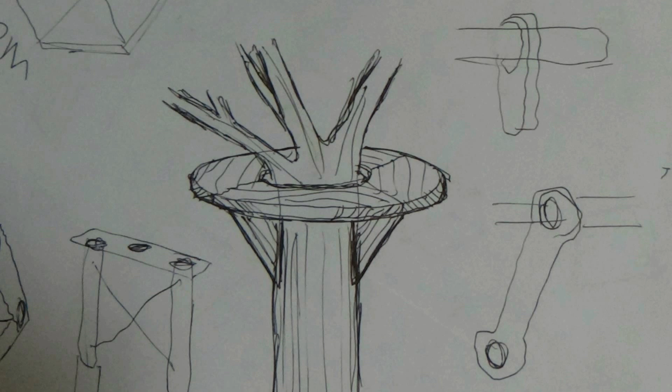Another kind of childhood dream was to build a timber structure, a tree house, and Nigel very kindly offered me the opportunity here about 10 years ago to build a tree house.

So at any rate, having bought my own tiny bit of land, the first thing I did was build a bird hide, and I call it the pack flat bird hide. So this is the finished thing, and it was kind of a back-of-the-envelope sketch.

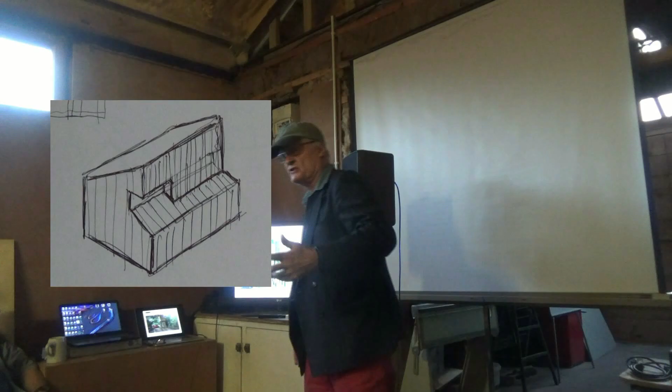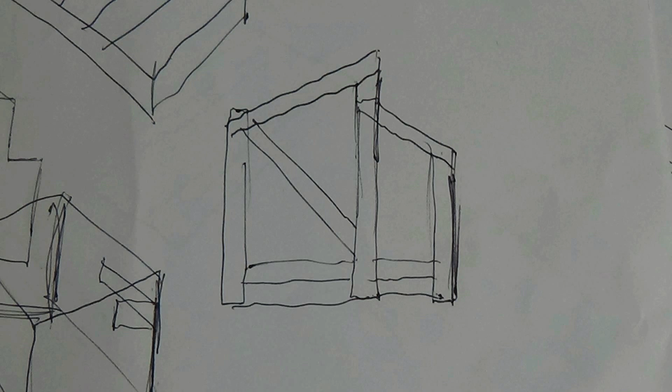It's very small. I designed the detail of it literally sitting on a toolbox on the platform, using a tape measure above my head and how far my knees stuck out. The irregular shape is where, if you think of it as a side profile of me sitting down and viewing the river, it's that small.

Because this, actually, I nearly broke my neck on this one. I built the platform, semi-built it in my workshop, and it fitted on the roof rack of the car. I deliberately left the inside hollow because it was too heavy for me. The whole thing was built by one person and it's heavy.

So this is about my 6th attempt on the ladder, nearly landing up in the river. At one point it pivoted round one of the poles and trapped me to it, like a clamp, and there was nobody else around to help. Once I got it on top, then I could slide it over.

I've got a background in construction management, but I've only been in post at Westonbirt for about 3 months. So timber framing is a kind of new world to me. I don't know everything, I don't profess to be an expert, so be kind.

So a little bit about the Arboretum. Robert Holford was a Victorian entrepreneur who was also a plant collector and a visionary. He created Westonbirt in the 19th century, and it's one of the world's finest collections of trees.

The site itself is about 600 acres, and it's a historic Grade 1 registered park and garden, with approximately 15,222 specimens and 1,777 species of tree.

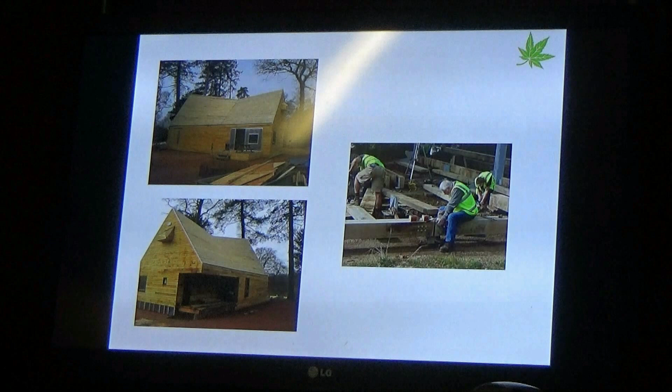As part of both of these buildings, we wanted people to have the opportunity to be involved. So at the mess building, we had our estate volunteers get stuck in. They had a really good go at the cladding, both inside and outside the building. And then as part of the tree management centre, in the next slide, you can see that we ran some hewing courses.

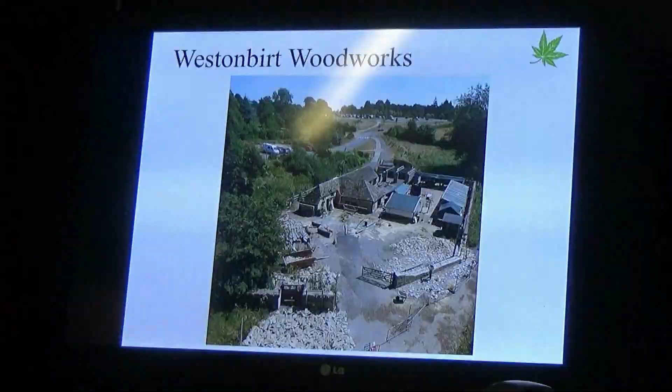Out in the downs, we created a bit of a spectacle and got everybody talking about what can be done with timber. So now we're entering our next phase of projects, and partly what I've been brought in to do is manage Westonbirt Woodworks. So here is the site. It used to be the plant centre, and it's currently situated just beneath our new treetop walkway, so it's got a hugely prominent position on site.

What we're really, really good at doing is telling the story of going out to collect the seeds, the propagation, the planting of the tree, and the life of the tree. But what we've not been quite so good at is telling the story about timber, how valuable it is, and what can be done with it. So this is almost like a showcasing of all the wonderful stuff you can do with timber.

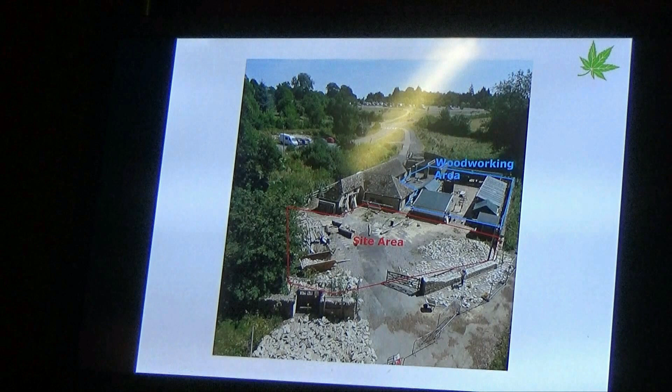It's also in line with the Forestry Commission's real push to look at sustainably British sourced timber, and also the centenary of the FC, which is next year.

So the site at the moment is just about to be leased by a chap called Paul Hayden, who some of you may or may not know. He runs amazing Windsor chair making courses on site, and he's going to take over this particular complex of Victorian agricultural buildings to run the wood centre.

So my role is to help build some of the buildings that we're going to have put in place and restore other elements of the building. So we're going to have a sawmill shelter for our brand new sawmill, which has just arrived from Poland into the UK. It's a Trak-Met 1200. That doesn't mean anything to me, but I'm told it's very good. And that's going to be situated in our new sawmill shelter.

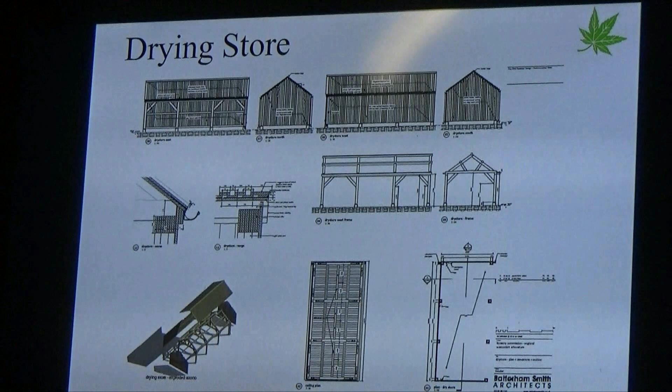There's then going to be a drying store, which is going to store all of the mill timber. And then the next phase of work will be a demonstration area, which is looking at conserving the cattle barn that we've got there, putting a roof on it, and creating a real hub for heritage craft and activity to enable lots of different people.

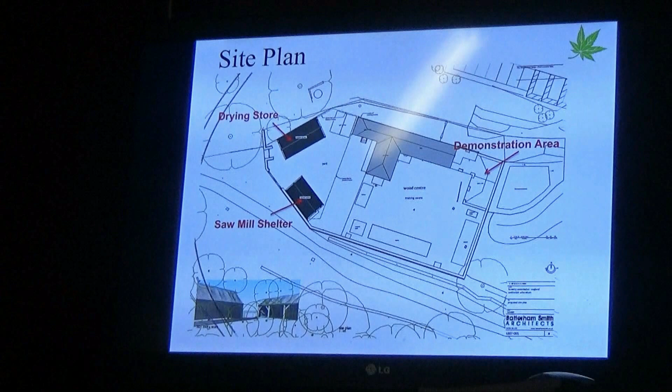Special apprentices, or specially accredited trainees, have this model in front of them, because this, as I say, is part of the family of the Carpenter's Fellowship as far as we're concerned. So all the new trainees are trained with that, and are photographed with that in front of them. So that's, yeah, it's a special relationship. Thank you for inviting us to be involved in these other projects as well.

So, the Sylva Foundation, let me start off. We're a small environmental charity, but we do work on a national level. Our mission is to help trees and people grow together. We work across Britain, and we are active under four main programmes.

We also have a programme called Education, and our main educational programme is forest schools. Our education manager works on a national level with that, and we also deliver forest schools on our land. So we have schools coming in, and we have young children coming in and doing whittling and things on site.

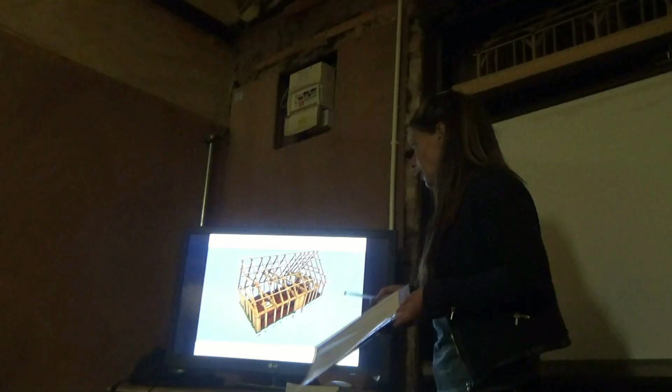The design has changed slightly, not much, but it's changed. These are Tim's drawings that we've taken on after discussions with the Institute of Archaeology and the Department of Archaeology, and the people we've met, to tell us what we think it might have looked like. There's another one, yeah, okay.

So the building, we said it was high status, we said how big it is. The wood has been kindly donated by Blenheim Palace again; we have a very good relationship with them. Probably predominantly oak, but Tim was saying earlier it could also be a mix of species.

Excellent. Okay, well, basically I'm here to talk about CF Projects. CF Projects is the wing of CF that deals with the projects we have in hand.

Who was here at St Fagans last year? A couple of hands got up. Adam Miller, who I can only describe as a genius with round timber scribing. Jimmy Simon. Rob over there — great to see you here tonight.

You guys understand what it's about when you get involved in a CF project. Come to site, the great buzz of producing one of these buildings.

And by the way, guys who are at St Fagans, there's a big opening in October, and I'll make sure to let you know. And when in October? I can't remember the exact date. Well, I know you're in the USA, Adam. So no, I'm not flying home until I think. We'll see if we can change a date to suit you.

Talk about two projects of recent vintage. The first one is this bridge that I've been doing some research on recently. It's at the Lamson & Goodnow Knife Factory in Shelburne Falls, Massachusetts. This factory was built between 1850 and 1855, and this bridge is original to the rest of the factory.

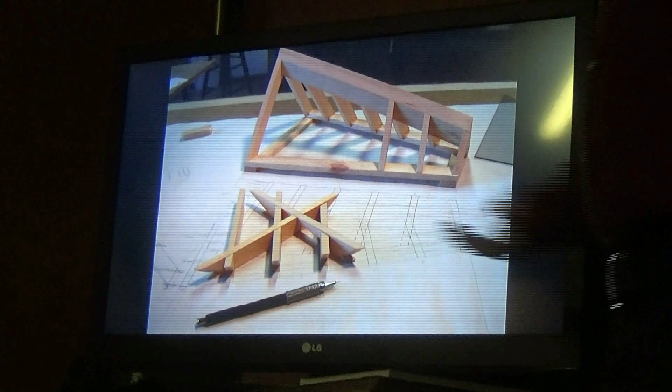There used to be another pier right here. And of course that meant they had to make the bridge steeper because it was still getting the same amount of rise. So what they ended up doing, all the details for cutting that whole model, including this St. Andrew's cross I've laid into the roof plane there, which is removable.

Next, please. So after learning these sorts of techniques, I wanted to both not forget them and practice them more, and work in curves because I really like working in curves. So I started working out of an old Bienfrère carpentry manual, a French carpentry manual that was published right around the turn of the century, in 1900 or so.

I worked on a series of models that were in there, including this. This is the first little capucine I built, which just has... these actually, I think, might be symmetrical curved hip rafters. So the next one, that was only about 8 inches wide.

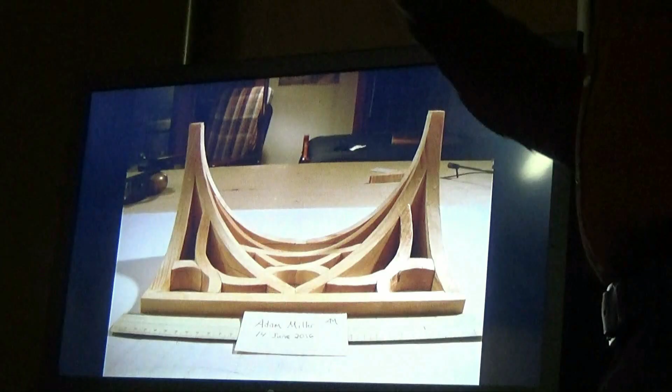Here's a slightly more complex one that has similar curved hip rafters, but with some pincer links built in. And then the next one, there's a little model guitar that I built, which is 12 inches wide on its drawing. And these three models...

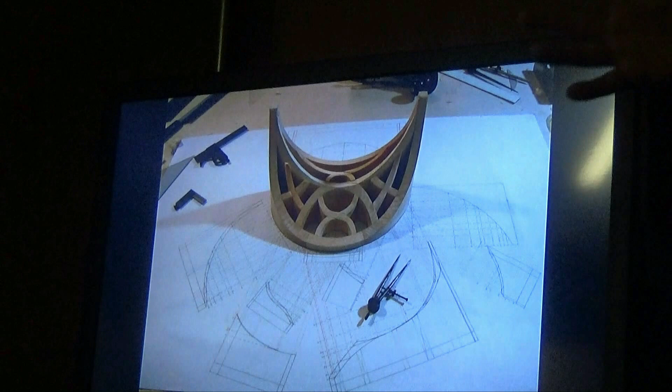This is like the cover photos on Timber Framing 121, I think, the journal. So let's see the next shot. Are these all the elevation drawings? Yeah, those are - I think it should go to the next shot. That gives the draw - this is a picture of the drawing, a scan of the drawing.

Next slide. So here's another one. I made this up early last year for a class I taught at Heartwood last fall, building this capucine, which has asymmetric curved hip rafters. So each one, and this model is all laid out with all the softening lines drawn on it for clarity.

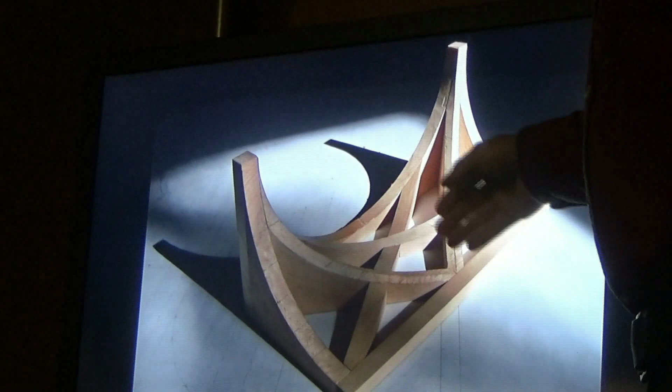Because it's a teaching model. But it's asymmetric curved hip rafters, so the pitch in the back, the angle of the backing, is changing constantly as you go up and down, and it's different on both sides of the hip. So the hips are mirror images of each other, so in the class I have the students solve for both hips, even though they're mirror images, for practice.

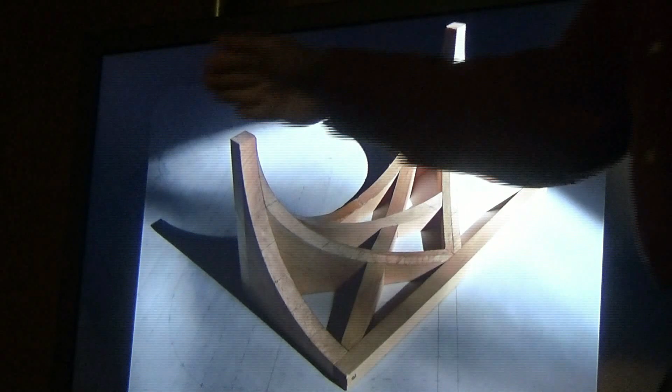And then we also, after successfully completing that part, I gave them this task where we did this passing St. Andrew's cross that passes up and over the hips with a half lap joint in the middle there.

Using history as a reference point, I'm going to do a snapshot tour right back to the Magna Carta, so it links tradition with modern practice.

Just very briefly, for those who didn't attend my short talk last night, I gave a quick one on this guitar I made, which I call an electric guitar. It relies on electronics, a sophisticated system of individual pickups on each string, and I can translate that through a guitar synthesizer and create piano sounds, flute, cello, electric organ, and normal guitar. It's made out of plywood, but also 400-year-old black walnut from Syon Park in London that a friend from the Forest of Avon cooperative that Nigel has been involved with gave me. So it's nice to combine old and new materials and old and new methods.

So in passing, I thought I'd mention that. I'm also very rooted in tradition. Tradition is a springboard.

I've just bought this from, I said I'd promote him and I've forgotten his name. He's the guy on the corner. Is it new? No, of course it isn't. No, I don't think so. It was made in the 12th century. Well, I'm in the right place, aren't I? It's made out of English oak, it's bespoke, and it's a sliding bevel, used for roofing, and I could have used it on my bird hide.

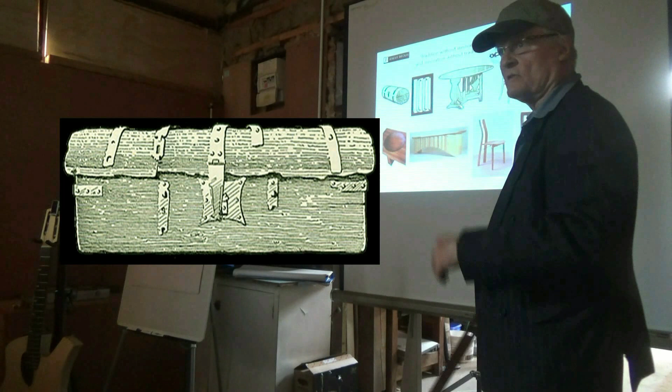We've got the medieval dugout chest. A lot of furniture then was movable because of the insecurity of being plundered and robbed by neighbouring tribes. That's a real thing, kind of a log, cut out of a log. This is early 12th century furniture made of oak.

This is a linen fold panel that was originally made in stone, and a lot of the woodworking crafts, as you know, have come from stone and church building crafts, masonry.

But Gordon Russell, I think, is undervalued. He used machines, and he was responsible. He was involved in aircraft design and Murphy radios during the Second World War, and he also made utility furniture, which I think is a valuable part of English history, furniture history.

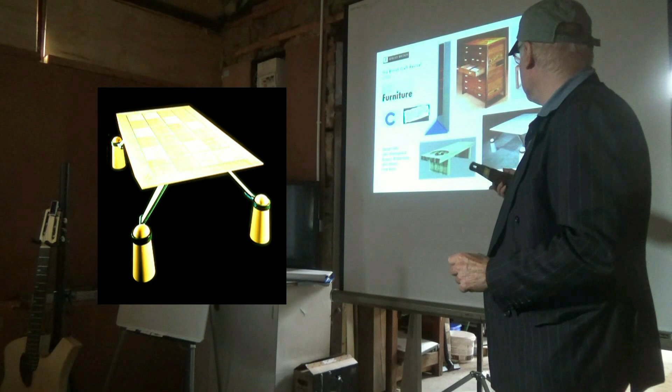And then this is Freddie Baier, who was the kind of punk furniture maker. He won an award in the 70s, and there was a celebration at the Savoy Hotel after his one-man exhibition. He turned up and the bouncers kicked him out because he was dressed like a punk rocker. He said quietly, well, actually it's in honour of my work or whatever. Oh, sorry, and they let him in.

One of Nigel's instructions to me was, you know, consider small timbers, okay?

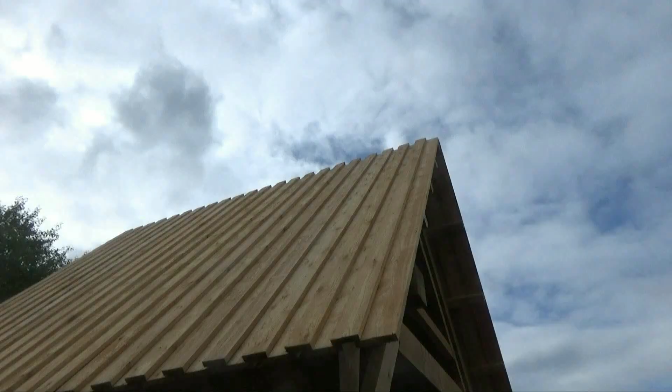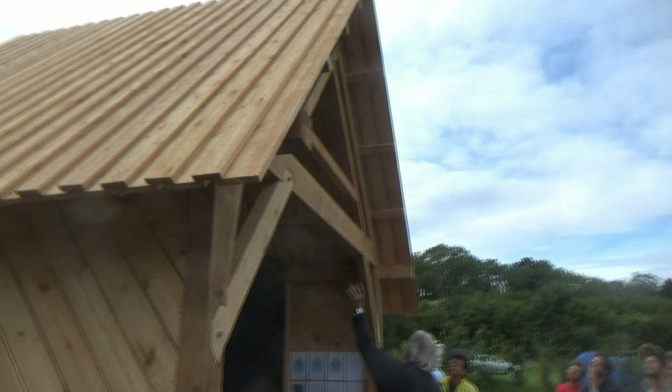Now, when you get time, come and look in here, but this is the cover of a book, a modern facsimile, by Sebastiano Serlio, Italian. Serlio's problem was, a carpenter was asked to frame the joists to hold an upper floor in a building. But, like Nigel, they said, we haven't got any timber that will span this distance. So say it was a 12-foot square, they'd only got 10-foot timber. How you can frame the joists for an upper floor using less than adequate length timber. So I knew about that book, and I had it in my mind. It generated these, what I call Catherine wheel timbers up here, which are not the full length they could be. This one could rise until it hits the other rafter and so on. So they are slightly shorter than expected timbers.

And similarly, the boarding in the walls here, none of those timbers would give us full height cladding from the bottom of the sill up to the wall plate. So these are all small or undersized timbers.

The angle of the roof, okay?